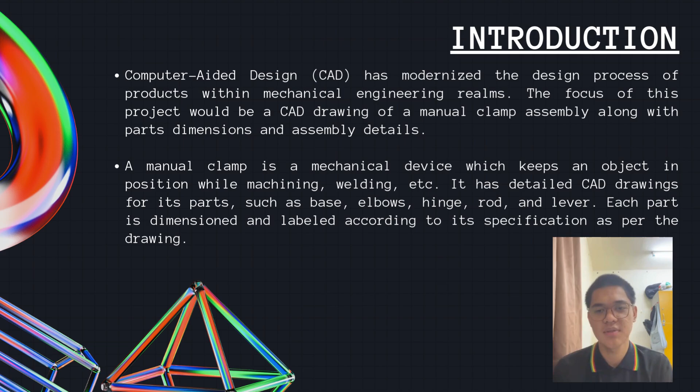For my part, I will tell you guys about the introduction of this project. Computer-aided design, or CAD, has revolutionized product design in mechanical engineering. This project focuses on drawing of a manual clamp assembly, detailing its parts, dimensions, and assembly. A manual clamp is a mechanical device used to secure objects during machining or welding. The CAD drawing includes parts like base, elbow, hinge, rod, and lever, with each part labeled and dimensioned according to its specifications.

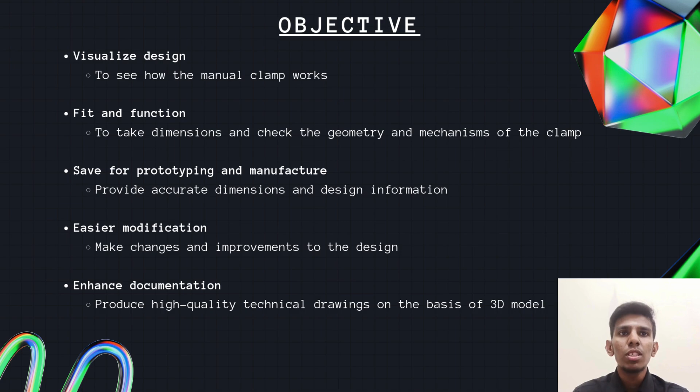Last, enhanced documentation, which is to produce high quality technical drawings or renderings on the basis of the 3D model for project documentation and assembly instructions.

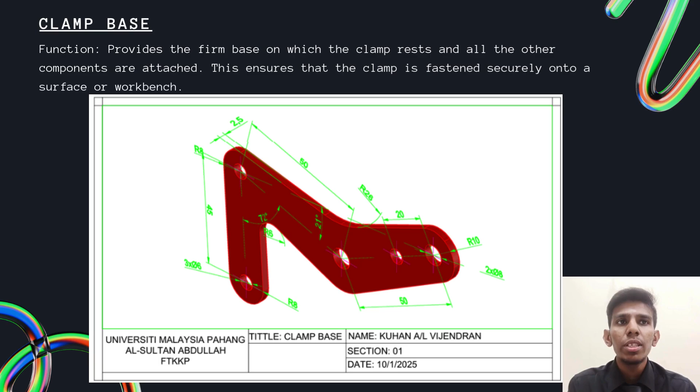Now for the part creation, which is the 3D drawing of the components. First, the clamp base, which functions to provide the firm base on which the clamp rests and all other components are attached. This ensures that the clamp is fastened securely onto the surface or workbench. These are the dimensions and the image of the 3D drawing that we proposed.

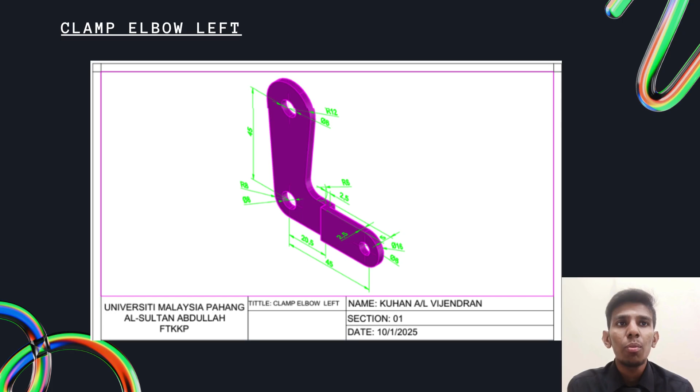Here is the dimension and picture of the clamp elbow left. The difference between the clamp elbow right and left is because the clamp attaches to the components driven from the left side, while the other is from the right hand side.

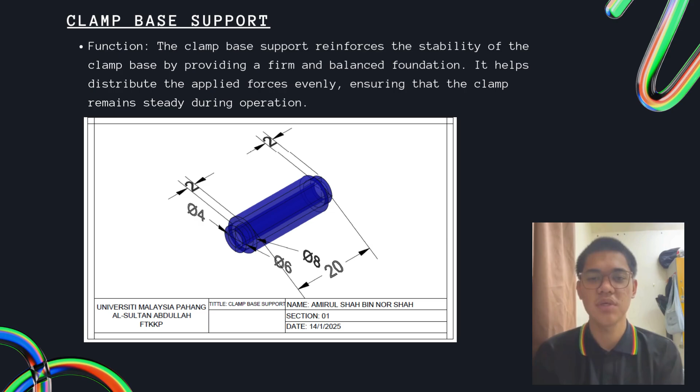For the clamp base support, the function is to reinforce the stability of the clamp base by providing a firm and balanced foundation. It helps distribute the applied force evenly, ensuring that the clamp remains steady during operation. Here is the drawing of the clamp base support.

The function of the clamp base spacer is to maintain a precise gap or clearance between the clamp base and other components. It ensures proper alignment, reducing wear and stress on adjoining parts during clamping and operation. Here is the drawing of the clamp base spacer.

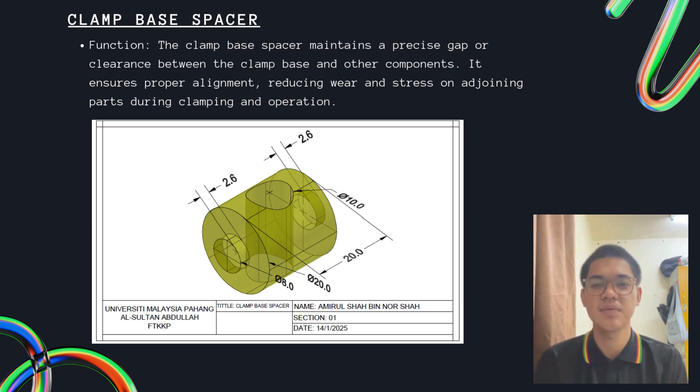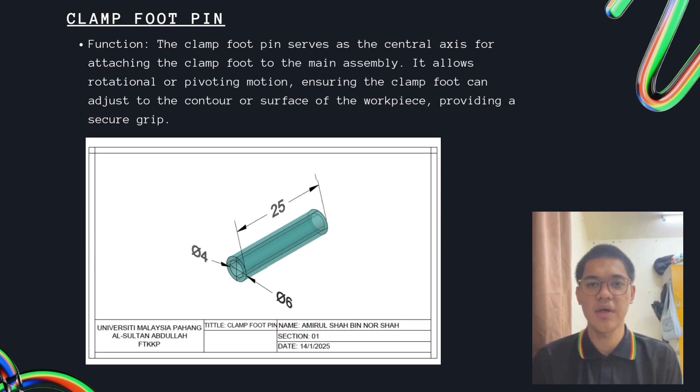For the clamp foot pin, it serves as the central axis for attaching the clamp foot to the main assembly. It allows rotational or pivoting motion, ensuring the clamp foot can adjust to the contour or surface of the workpiece, providing a secure grip. Here is the drawing of the clamp foot pin.

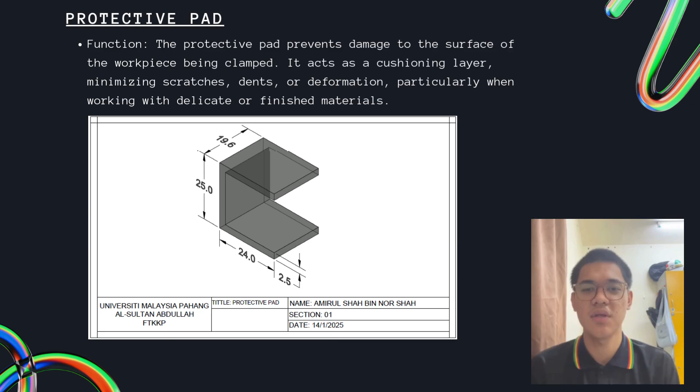The function of the protective pad is to prevent damage to the surface of the workpiece being clamped. It acts as a cushioning layer, minimizing scratches, dents, or deformation, particularly when working with delicate or finished materials. This is the picture of a clamp tee along with the dimension.

A clamp tee serves to connect the left and right clamp elbow together with the clamp rod at a 90-degree angle. It also provides a rigid and adjustable connection between the components.

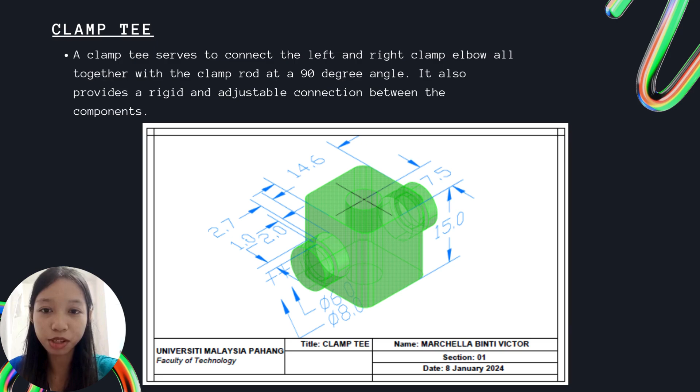The screw applies pressure to securely hold the components in place, ensuring all components are tightly held together during processes like cutting or welding. This is the picture of the screw along with the dimension.

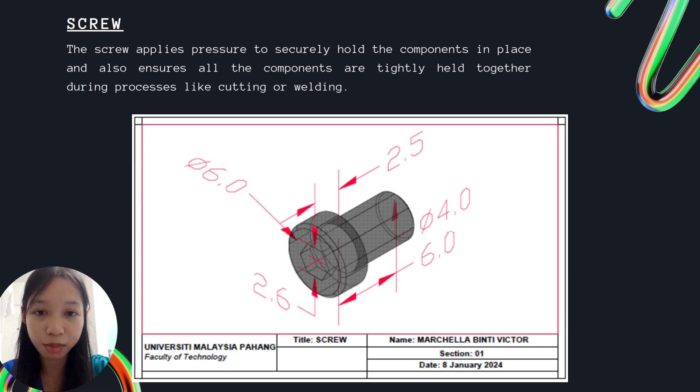This is the picture of a clamp rod along with the dimension. The clamp rod provides the firm base on which the clamp rests and all other components are attached, ensuring the clamp is fastened securely onto a surface or workbench.

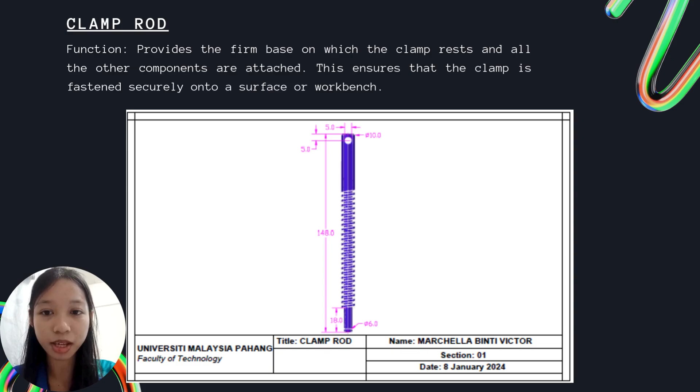The lever gripper allows the user to apply and release clamping force. This function helps the user quickly and effectively apply consistent pressure without requiring excessive effort, making it a convenient tool for holding objects in place during operations.

This is a 3D drawing of a nut wrench with the dimension. A nut wrench is a manual clamp tool used to tighten or loosen the nuts that secure the clamped component in place. It applies the necessary torque to ensure the clamps hold firmly in position, providing stable and secure clamping for various tasks.

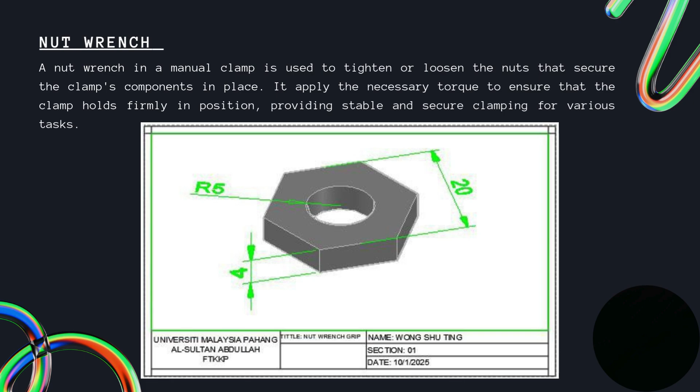Next, this is the 3D drawing of a clamp hinge with the dimension. The clamp hinge connects the clamp base along with the clamp elbow right and left, allowing them to pivot relative to each other. This motion enables the clamp to open and close, facilitating the adjustment of the clamping force and positioning of the jaw.

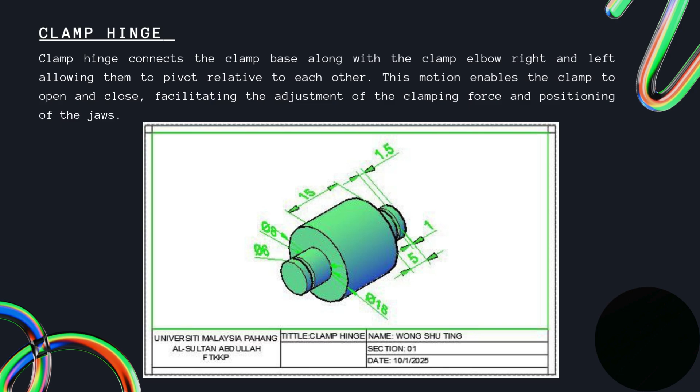Next, this is the 3D drawing of a clamp lever with the dimension. The clamp lever in a manual clamp is used to control the tightening and loosening of the clamp. When the lever is pushed or pulled, it activates the clamping mechanism, applying or releasing pressure to hold the component securely in place.

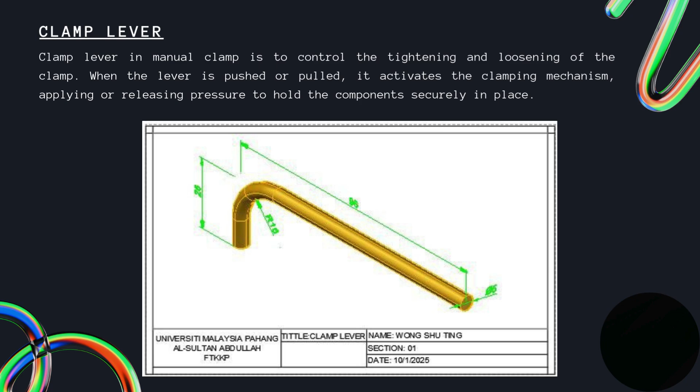This is the 3D drawing of a clamp foot with dimension. A clamp foot serves to evenly distribute clamping force, protect the components from damage, provide stability by preventing movement, and ensure proper alignment or support of the material during operation.

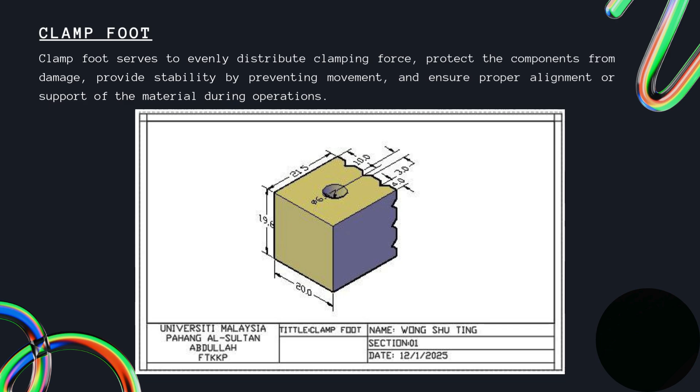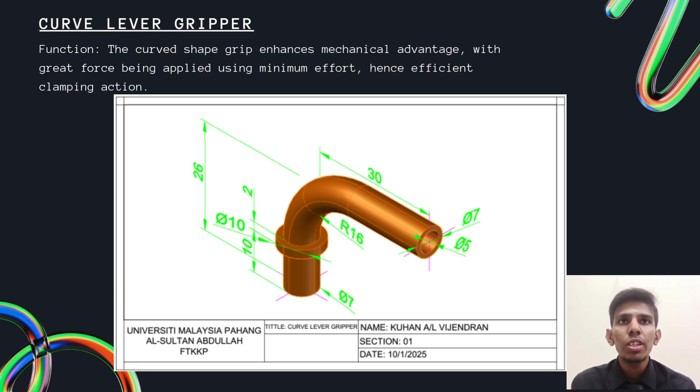This CAD drawing of a manual clamp assembly demonstrates how computer-aided design enhances modern mechanical engineering. It breaks down each component, highlighting the importance of dimensional accuracy in manufacturing. The drawing serves as an educational tool for CAD students, showcasing standardized routing and assembly processes. The project highlights CAD efficiency in design, modification, and optimization, reducing errors and improving workflows.

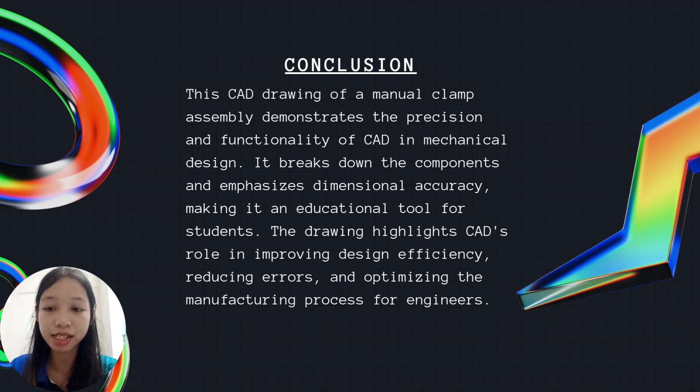It emphasizes CAD's crucial role in shaping the future of mechanical design and manufacturing for both students and professionals.